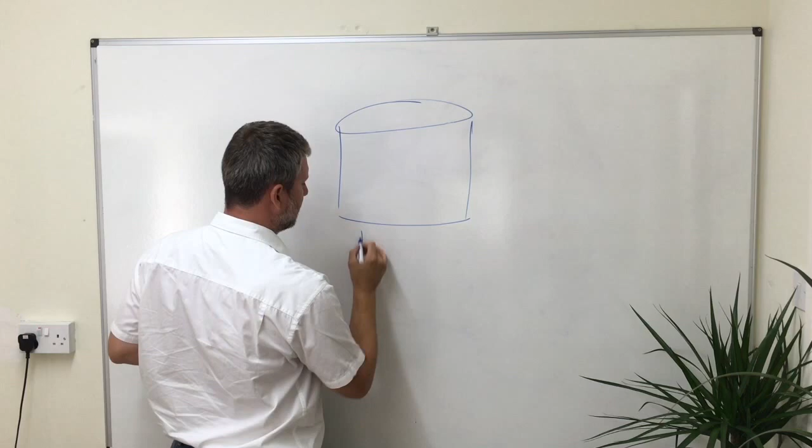so we'll start: if you were doing R&D, for example, and you just wanted to measure the inner air temperature of your mould, quickly dip in, measure the temperature, and get back to production. So let's put our mould here. Let's say our mould is here, and we've got a slip ring, with an arm coming out here. So where is the best place to measure the temperature of the inner air?

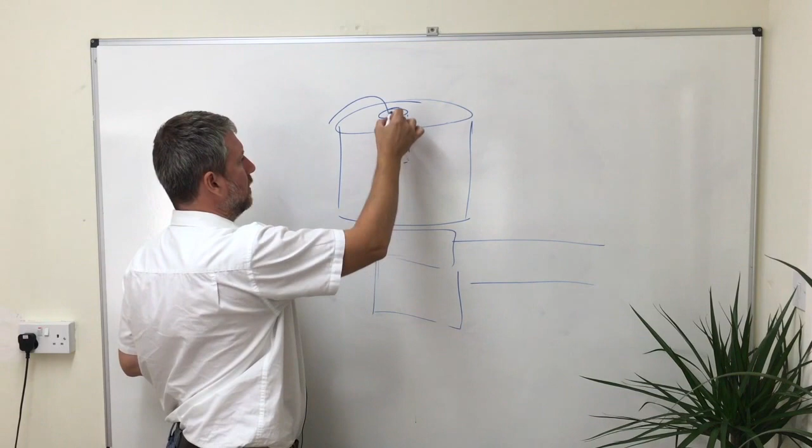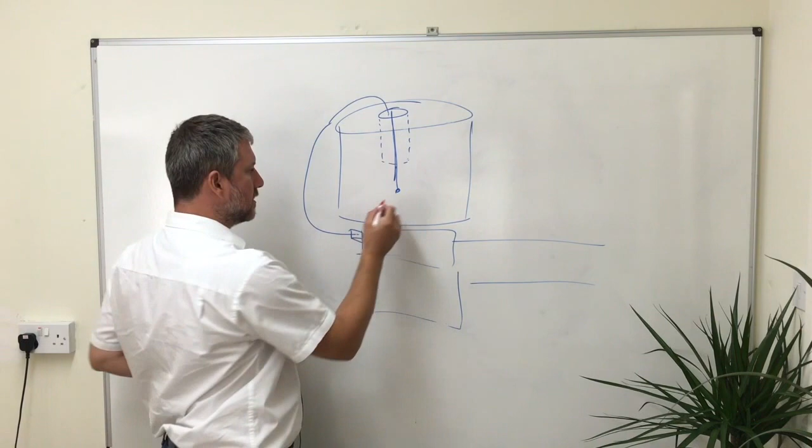Well, the easiest thing to do is just to put a simple thermocouple through the vent pipe, measure the temperature that way, bring this round and plug it in to the slip ring. That's easy to do. If you're doing R&D, then you can use some of the bare beaded thermocouples. A bare beaded thermocouple has got a very high response to changes in temperature, and so that will let you see all the intricacies of what's happening inside that mould.

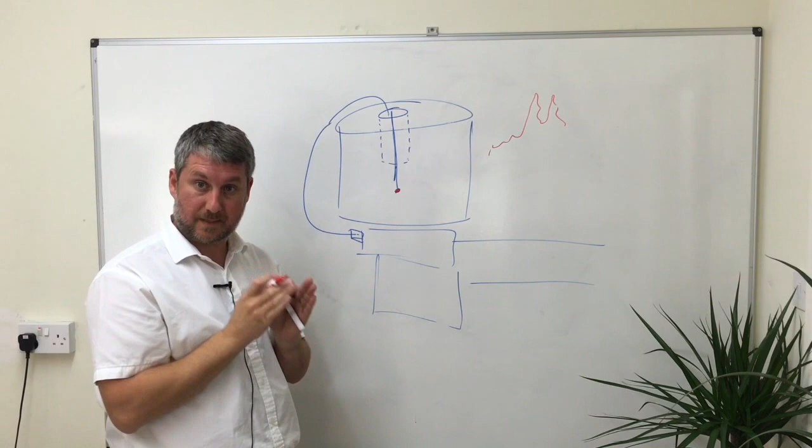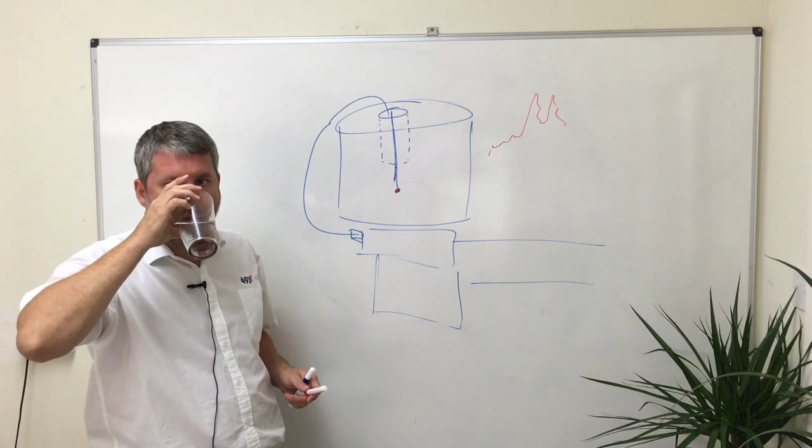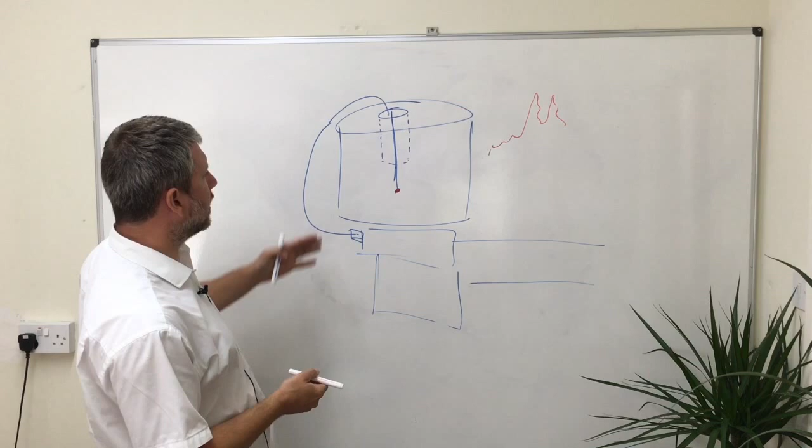Okay, fast response, because the part of the thermocouple that is doing the business is not in any way sheathed to reduce the speed at which the temperature can get to that thermocouple probe. And if you're operating in a production environment and you've got your guys demoulding this every time, now let's say the flange is here, well, they're going to have to remove that thermocouple every time.

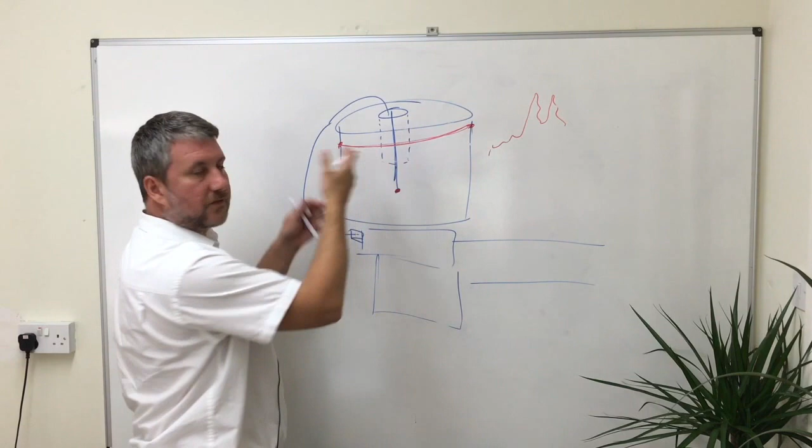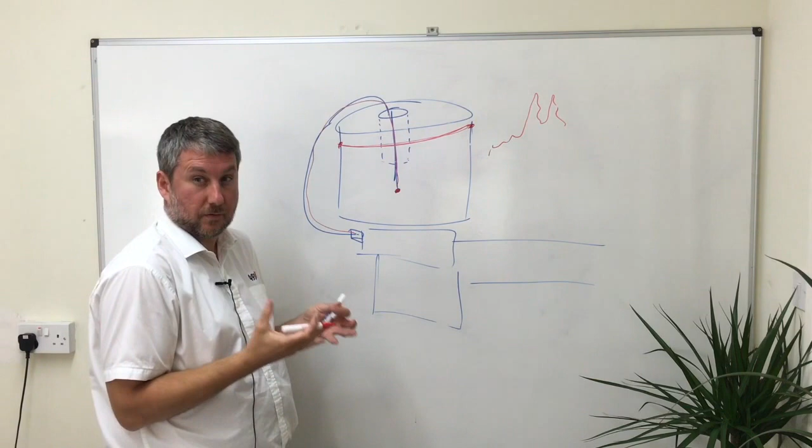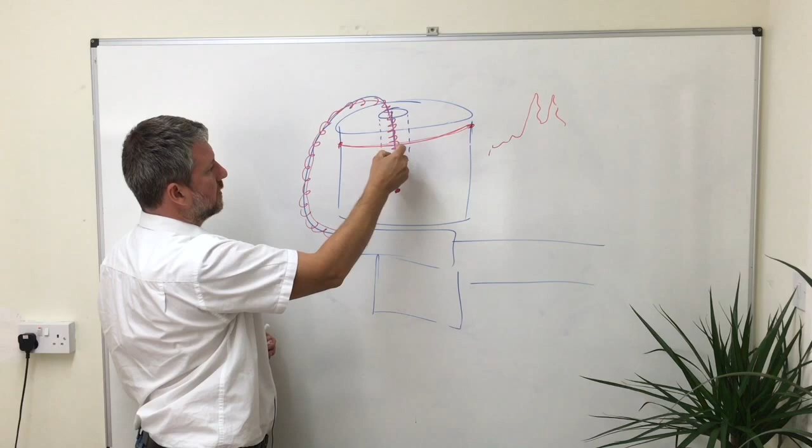So then we want to move away from just the simple cable with a bare bead thermocouple. We want to get into something a little bit more robust. So what we could do is use the production probes that we've got. And the production probe basically puts a conduit around the probe, and then at the end of the probe there is a sheathed tip, to protect that bead from powder and melted powder.

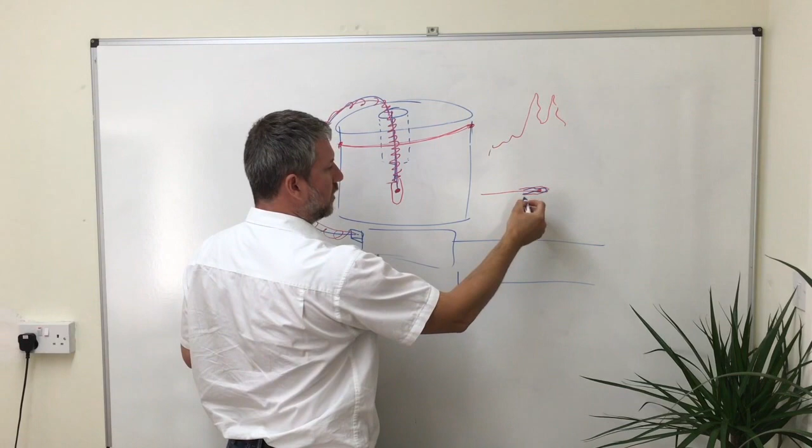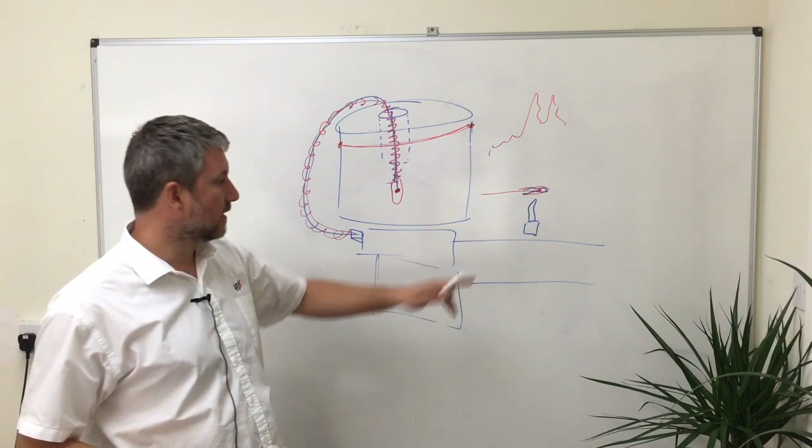So for example, if you use just the bare beaded thermocouple and you finish and you take that out of the vent pipe, you'll find that the bare bead is probably covered in a little bit of plastic now. And what you can do is you can either just cut that off, twist the ends together and make a new thermocouple, or you can put a torch, a flame below that, and burn the polyethylene off. It gets the polyethylene off, but it also destroys some of the sheathing near the tip.

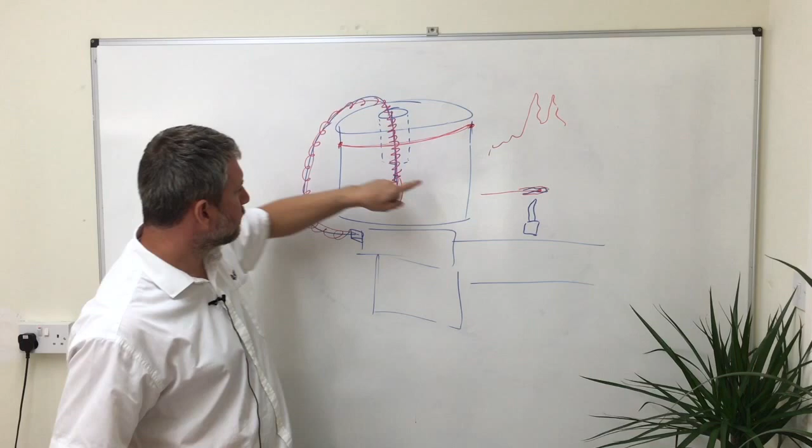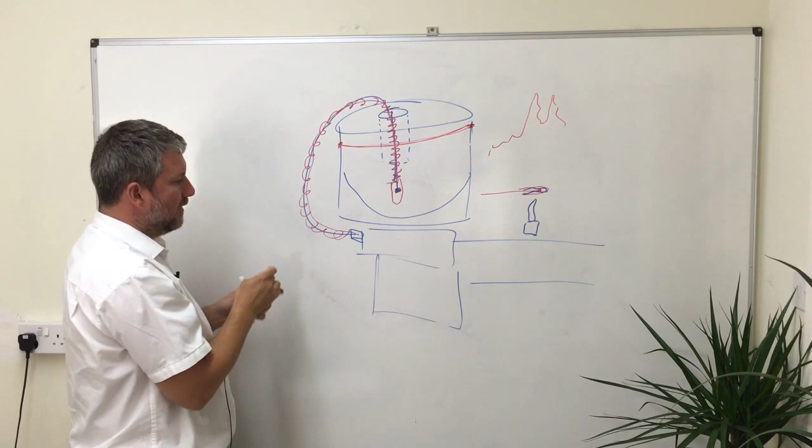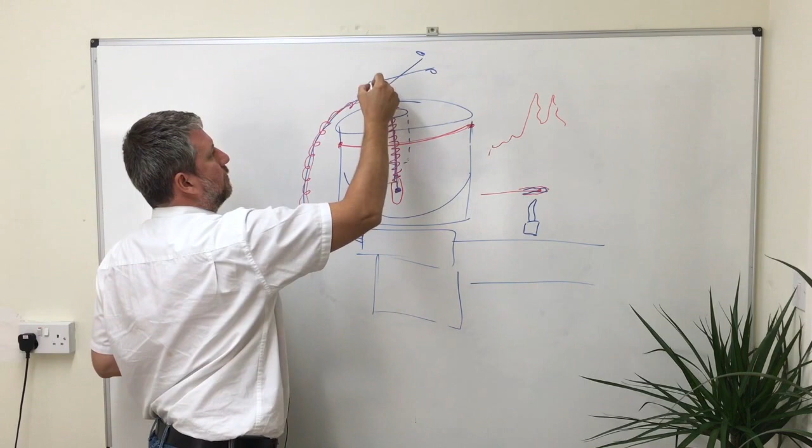Excuse me. The best way to do it is, of course, have this situated in a position where, as the powder is tumbling, the bead is not actually in that powder pool. So we've moved to the production side. We've got one production probe coming up. We could have a bracket here, or a clamp, like that's such a badly drawn clamp, but hopefully you understand what I mean.

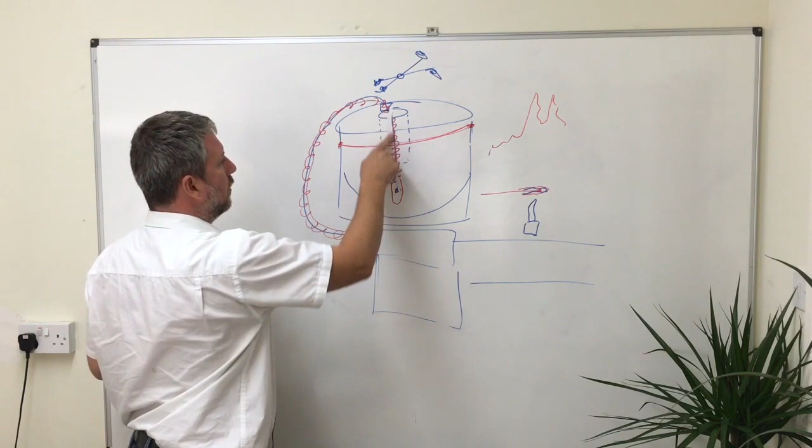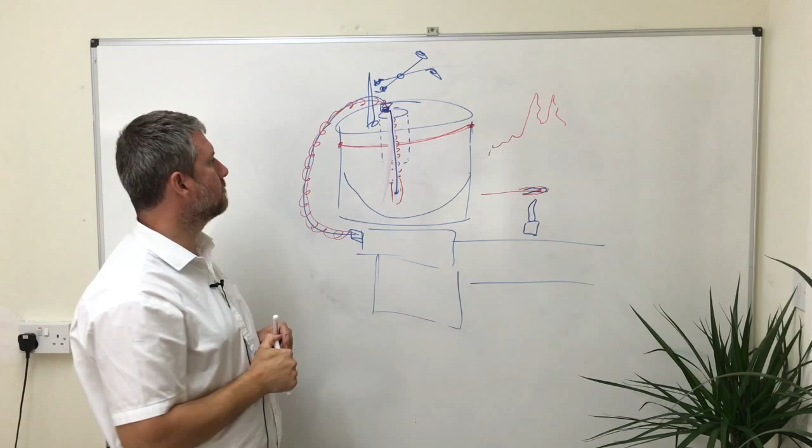Like an earth clamp that a welder would use, and clamp the probe, which would be stopping here, coming down into the air. Clamp that probe to maybe a post or something beside the vent pipe. You could consider perhaps just having an extension cable coming up here. So we could come out of here, come up to the side and have another socket on the top, and then you could plug the short thermocouple in there.

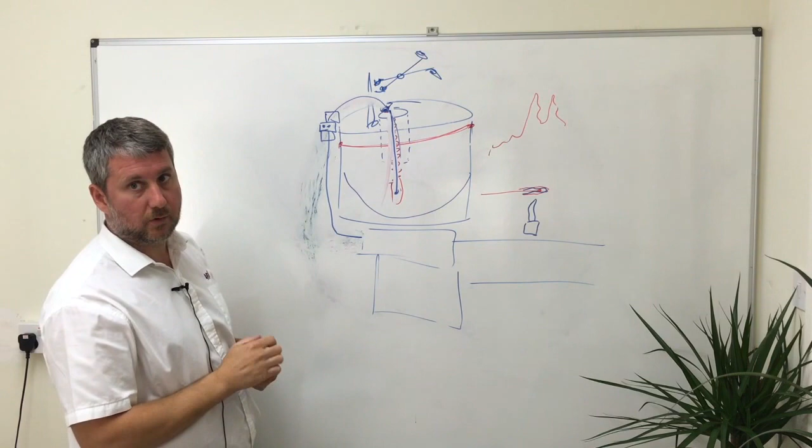So when it was time for demoulding, the operator would just unplug this. The probe would remain part of the vent pipe, and the probe and the vent pipe and even the lid would come away in one go, and you're left with this extension attached onto the side of the framework. Okay, what's the next stage that we can go to?

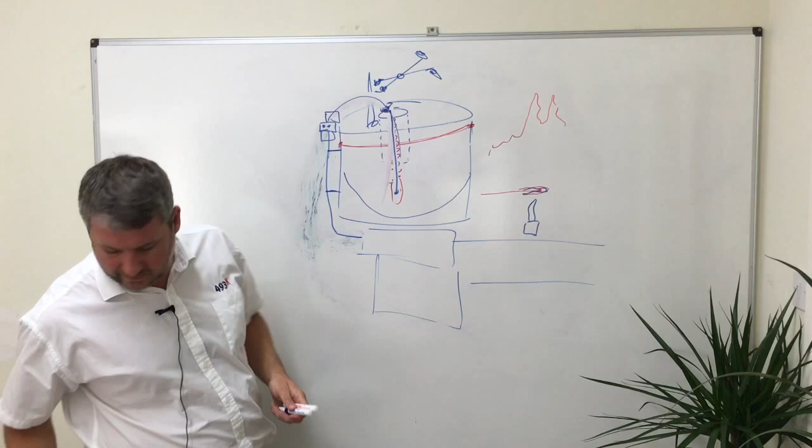Well, internal air is absolutely the best method of getting processing information back from rotational moulding. That's the one that all the research has been done about. That's the one that will tell you when to drop your second shot of material. That's the one that will tell you when the peak internal air temperature is right, when you've got your optimum internal air conditions. That's the one we want, if at all possible.

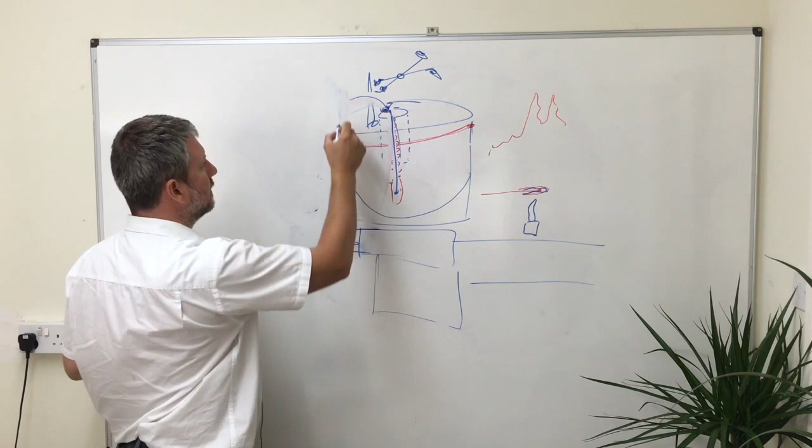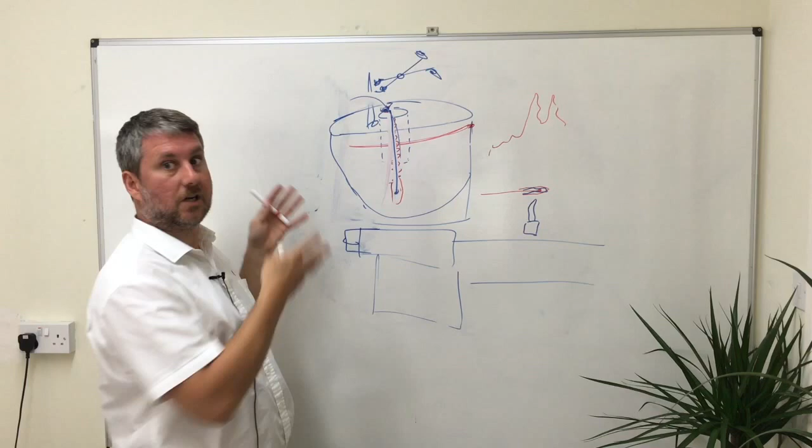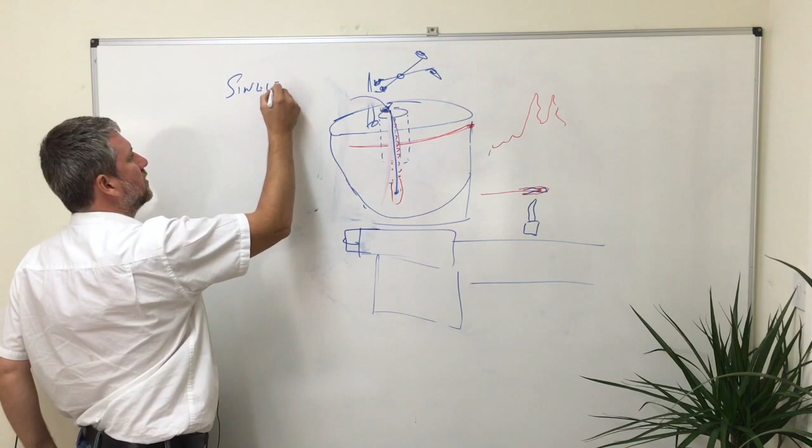But that's not always the easiest one to put in, because you're dealing with vent pipes, you're dealing with probes going into the vent pipes, you're dealing with operators touching that, okay? So what some of our customers do is they say, well, look, we are using a single wall part, okay? Just single wall, polyethylene, pretty straightforward.

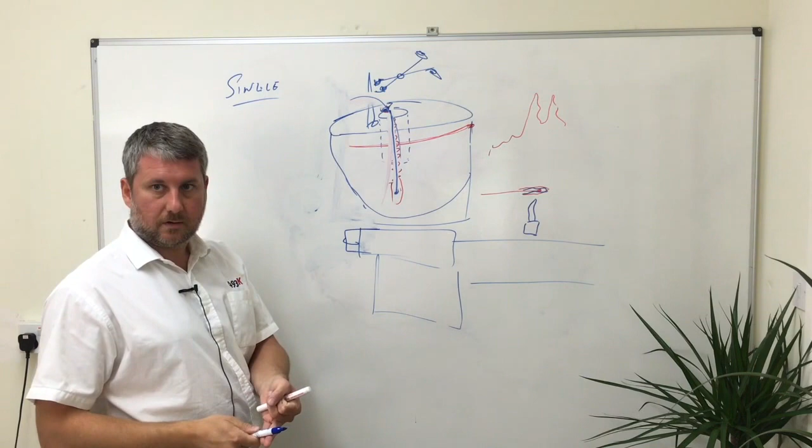We still want to measure the temperature because we're looking for consistent quality, we're looking for traceability. If our customer says, how was this one cooked, we can go into our server and find out. But we don't want our operators touching those probes. So what some of our customers do is they simply take the probe from the K control and they put it into the bottom of the mould. Okay. They don't put it into the air, they just put it into the bottom of the mould.

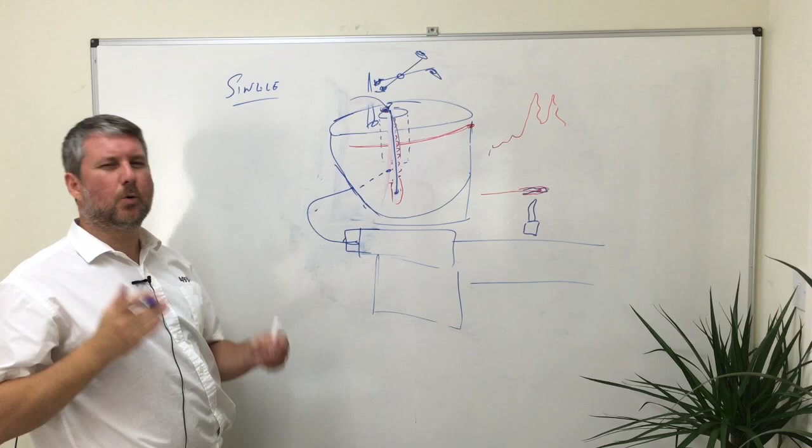They're measuring tool temperature. Well, not quite tool temperature, they're measuring an interface temperature. Let me show you where they put that probe. So if I draw this blue, the blue wall of the mould, the metal mould wall, and then we use red to signify what the plastic would be doing. So there's a plastic wall there.

Okay, and that probe would come in, and there would be a hole drilled in the mould wall, and if it's aluminium, you maybe thread that, and then the cable that comes from here would have a bolt on the end of it. Okay, bolt on the end of it. Cable goes out to the K control slip ring, and the actual tip of the thermocouple is just embedded here.

Okay, so you can see that it's just touching the interface between the mould wall and the plastic. Okay, it's not going to give you that beautiful internal air temperature curve that you get, showing you the peak optimum temperature to take it to. It's just going to show you a temperature. It's going to rise up.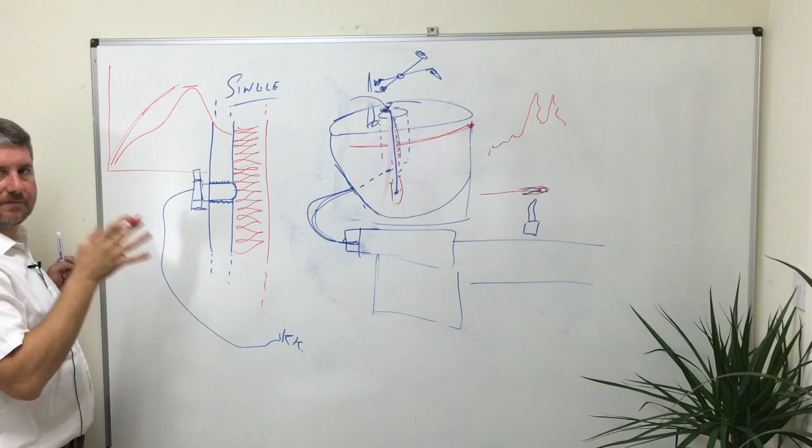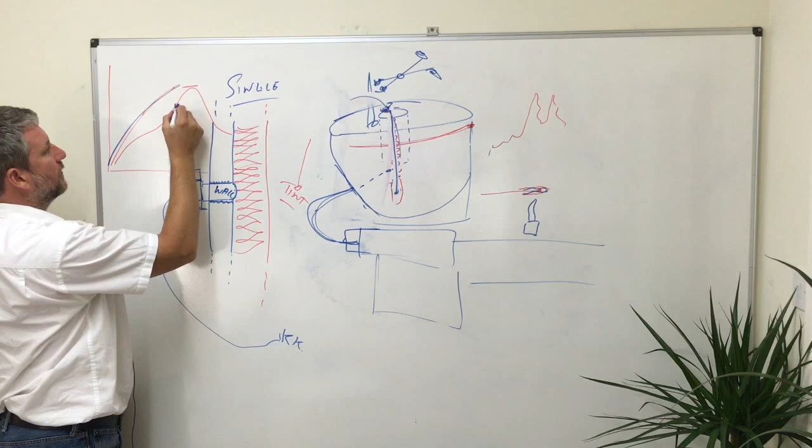But the first time you run this, you put two thermocouples, one to measure the internal air inside the part here, and you use one to measure the mould wall temperature here, and you correlate them, and you say, okay, for a perfect part, we need to take it out of the oven here, okay, and it will rise up.

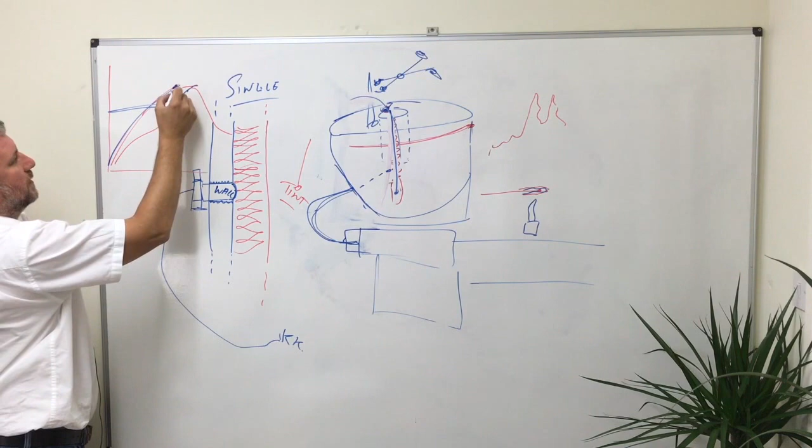So what temperature at that point in time is the mould wall temperature? Well, you just go up and you say, okay, so there's the temperature there, T wall and the T internal mould air. Okay, so there's a correlation, if you like, between the mould wall temperature and the inner air temperature. If you're doing single layer parts, that gets you a good way towards removing variability to do with ambient temperature changes.

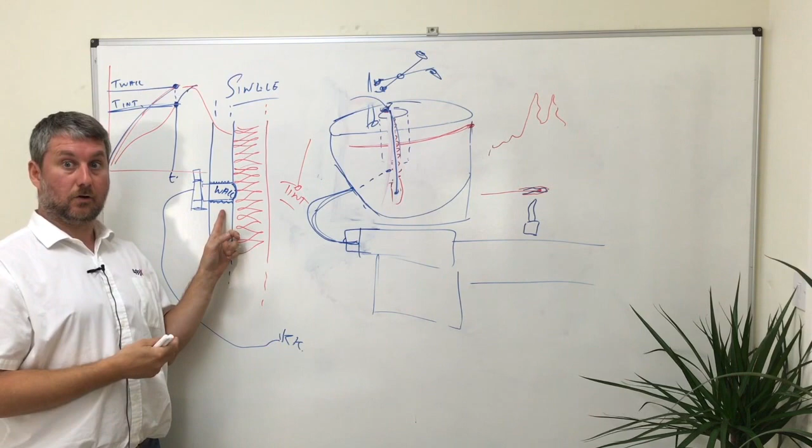If it's a very sensitive material, if you're into the nylons and the engineering materials, the exotic materials, you don't want to do that. You want to measure the inside air temperature. But for regular PE, this takes you a long way towards consistent control, compensating for variations in ambient temperature.

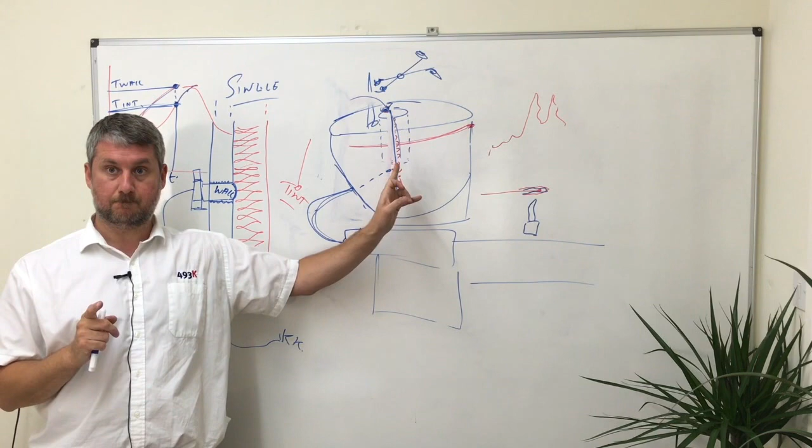If you are multi-layer, 2-layer, 3-layer, 4-layer, that's not going to work for you. You're going to need internal air temperature measurement. Okay, so you need therefore to get a probe inside there. So the two ways we can do that, let's just work over here.

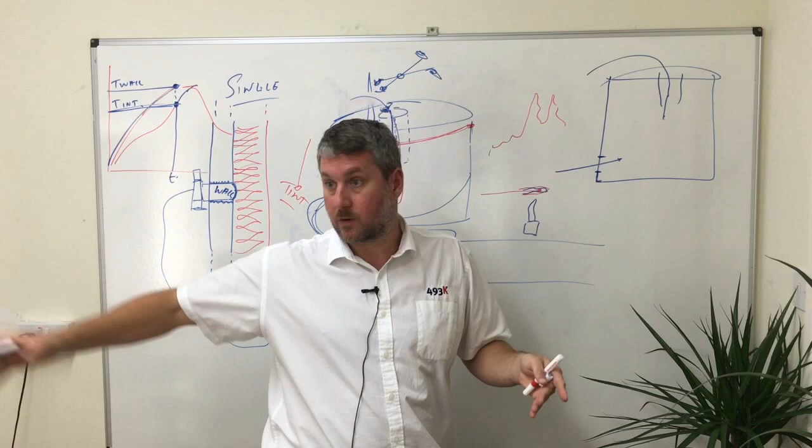The two ways we can do that, if we've got our mould here, we can either go in the top through the vent pipe, okay, or we can come in the side via some part of the tank that's going to be cut out. So if it's a tank, you're probably going to have an outlet here to screw or attach the pipe work for the system that the tank's going to be installed into. So that's going to be cut out.

So therefore we could put a probe in here. Okay. So we're measuring internal air here, or we're measuring it here. Now again, this temperature is close to the walls, close to the corner of the mould. It's not in the centre. And I would say just at this moment in time that this internal air temperature trace is good to compare cycles.

Okay, disadvantages with doing it this way for multi-layer stuff is, well, you probably need that vent pipe to get your second, your third shot in. Thermocouples are going to get in the way. And when it comes to demoulding, again, we're back to this scenario here. If you remember earlier, the operator has to take the thermocouple out, you've got this floppy lead, which is increasing the chances of it breaking.

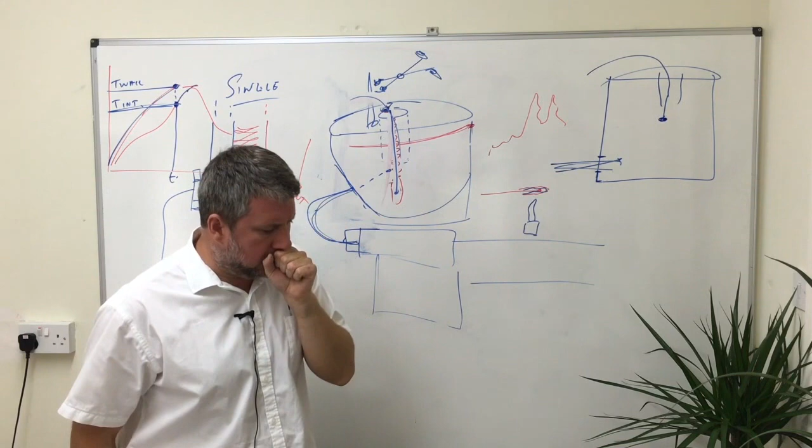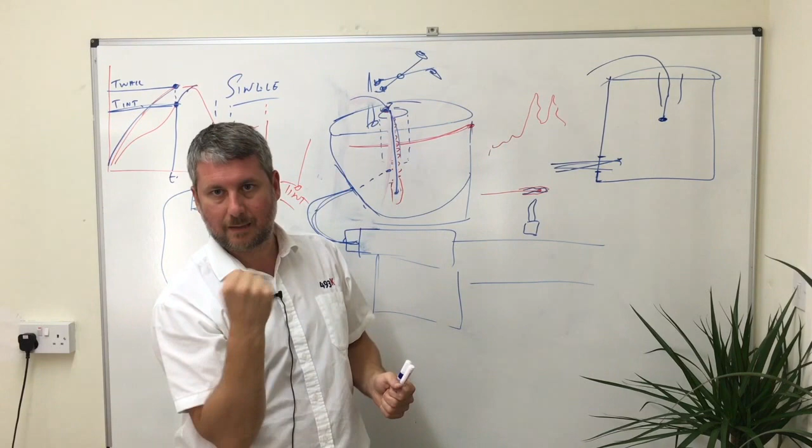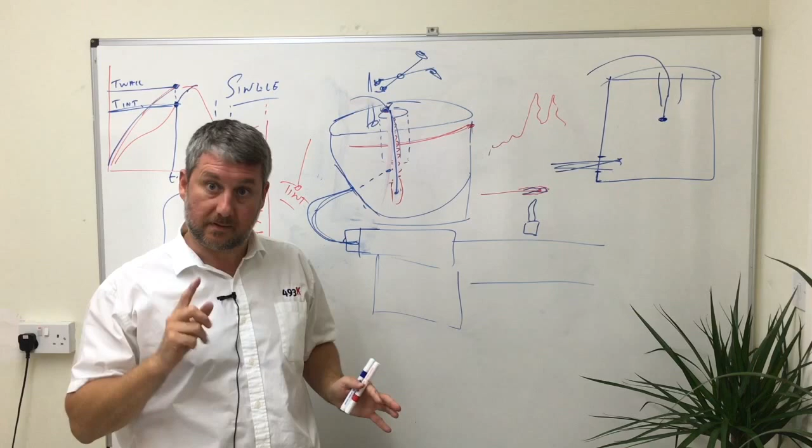So what I would say is, find a spot where you're going to drill a hole anyway, get a probe in there, and what you can do is build a jig, as I'm sure you will have already thought about. Build a jig to easily remove that probe. That jig could be based on an over-center clamp. As you pull the clamp back, the probe comes out with it. It could be based on a spring, so you just pull it out and lock it in position. Then the guys can demould. You've got to remember to put it back in. Okay.

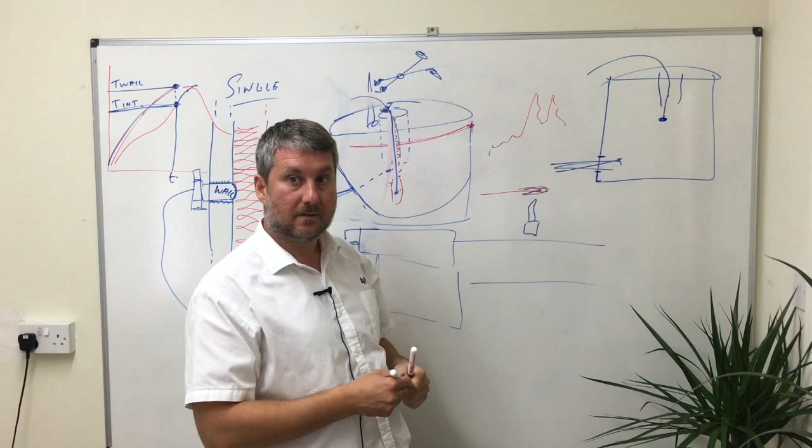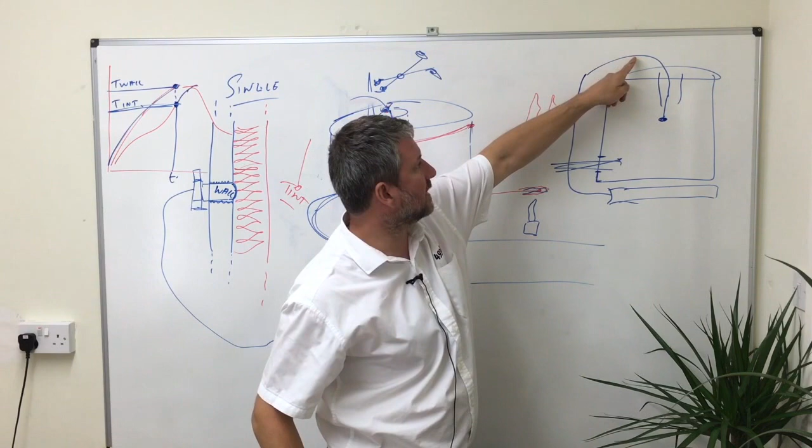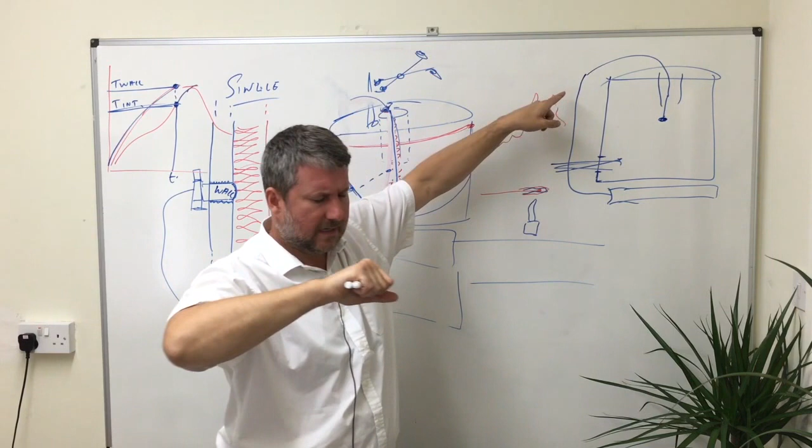It's always useful to prevent the guys from opening the lid, lifting it up, and forgetting to disengage the thermocouple and wrecking the connection to the K control. It can be a useful thing to put a small piece of chain between a fixed point on the thermocouple and the base of the mould. So if they are lifting it up with the crane, it'll catch in the chain and stop, so they can disengage the chain and then be reminded to remove the probe.

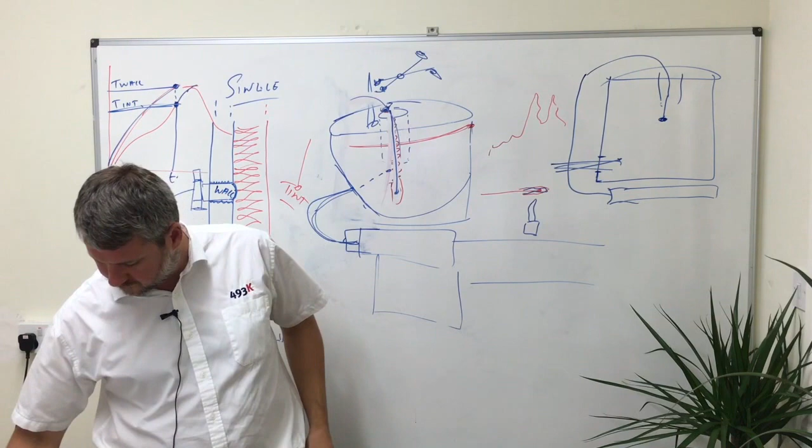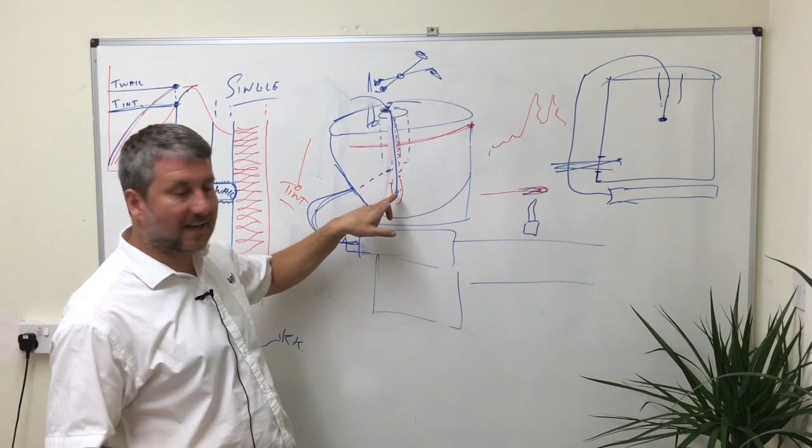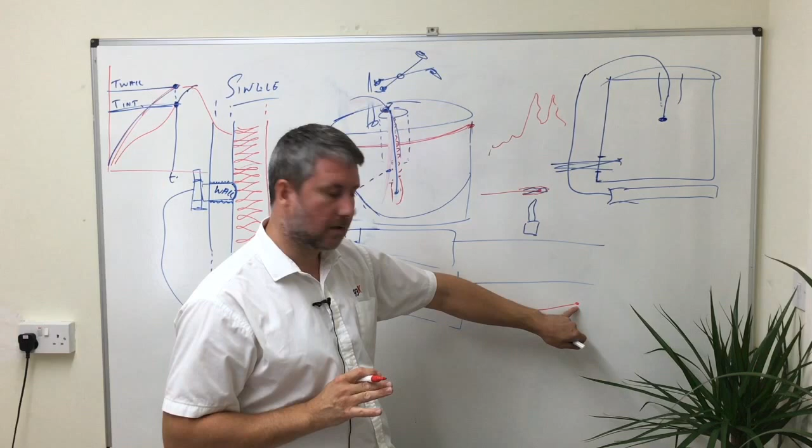So the actual probes themselves, we've got a couple of different types that we have used over the years. We're looking for a bit of a balance here. The fastest response, the best data that you can get back from a probe is when it's just a bare bead, okay? A bare single point bead. We'll call that BB, bare beads. Bare beads give very fast reaction times. So if you're doing some kind of R&D work or process setup or product setup work, you probably want to start with a bare bead, because that will let you know what's happening inside that mould. That's going to help you understand what the powder's doing.

Okay, but that's going to be useless for production. Your operators are going to have that wrecked in no time at all. So I see these bare bead probes as almost disposable. You use them once or twice and you get rid of them. We can supply a roll of that cable, and then you can make them up very simply. A roll of cable and a dozen plugs to go into the K control and you're good for that kind of R&D work. So we're looking for something a bit more robust.

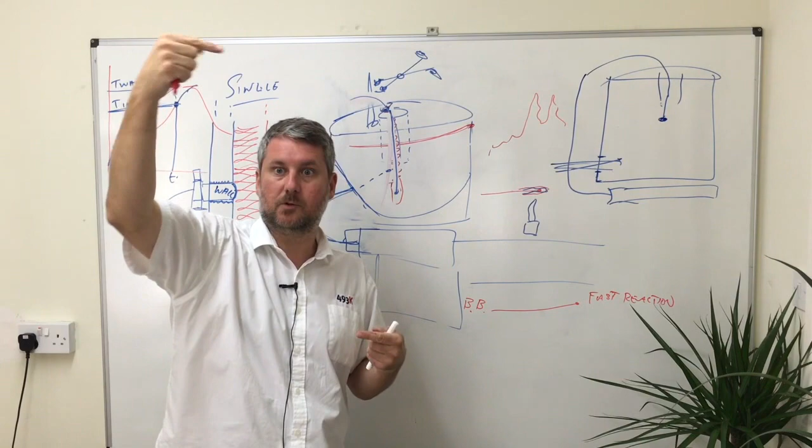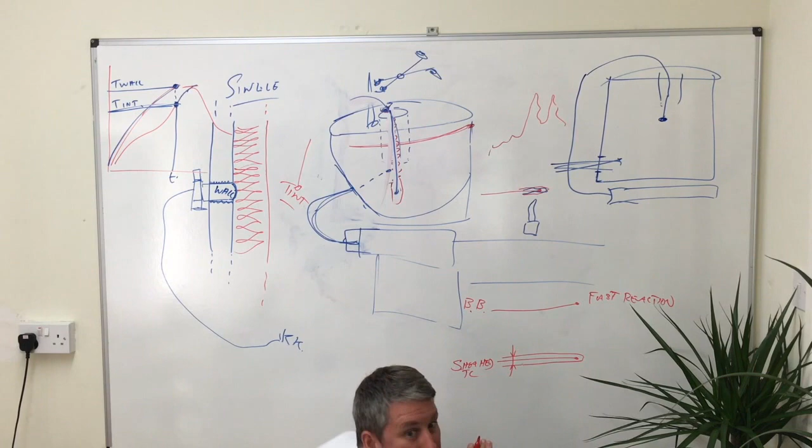So let's go to the opposite end of this. What we're talking about here is a sheathed production probe, much like you would see if you've got an extruder. You know, those process probes, or an oven, you see a big process probe coming in the top. So what we've got here, we'll call this a sheathed TC, and basically that is a bare bead with a sheath around it, and that sheath, as an absolute maximum, we're talking 6 mil.

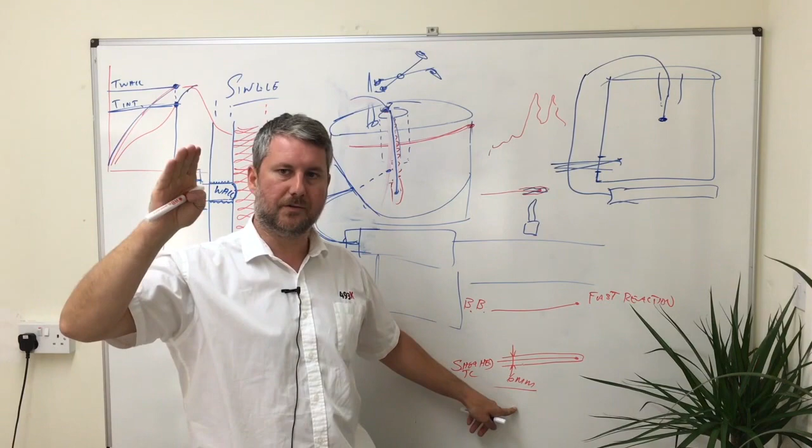Okay, we're talking 6 mil maximum. Even 6 mil is absolutely on the limit in terms of the speed of the reaction. So for a 6 mil probe, we're going to put down slow reaction.

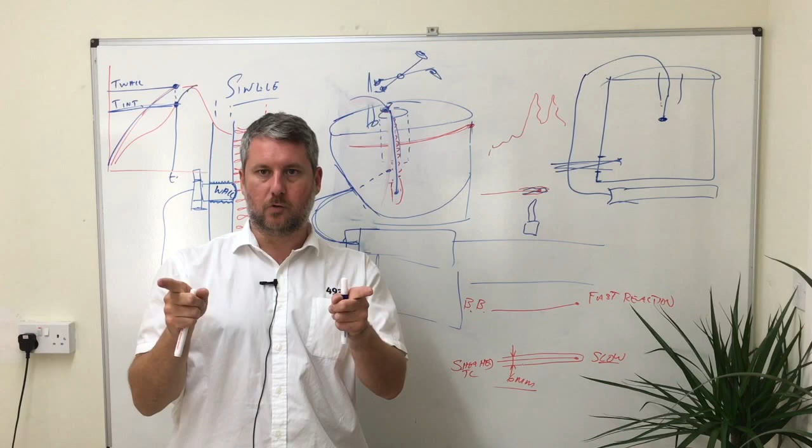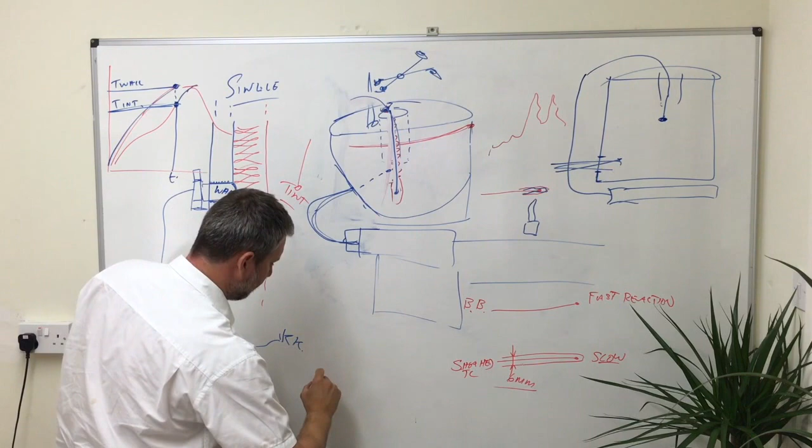Okay, so if you were to put 2 probes into the K control, a bare bead and a 6 mil production probe, and you were to measure them at the same time, the bare bead is going to come up nice and fast and down. The 6 mil one is going to be slow to react, so it might do something like this. Okay, so it will be slower to react, slower to respond, really robust, really strong, harder to break, but doesn't really give you the information in a timely fashion.

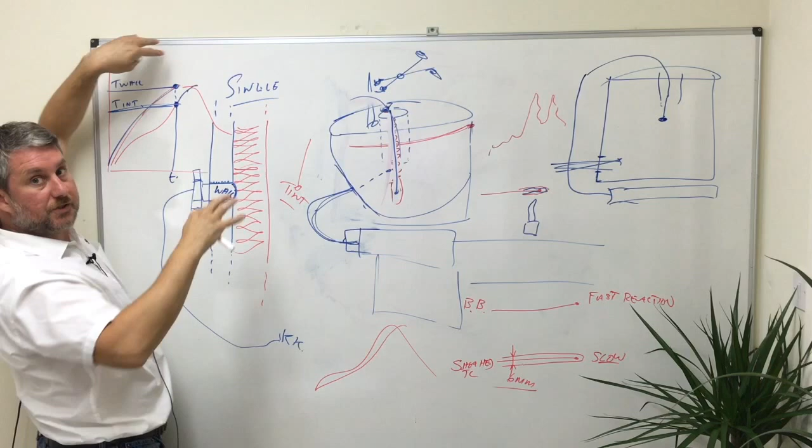You can correlate it, as we talked about up here, and say, yeah, that's okay, we'll work with 6 mil, we'll get up here, and when it's finally responded, we know that the true temperature is back here somewhere, and adjust for that. But what that is, it's just slowing things down. It's not giving you the true reading. It's giving you consistency, but perhaps not precise real temperatures.

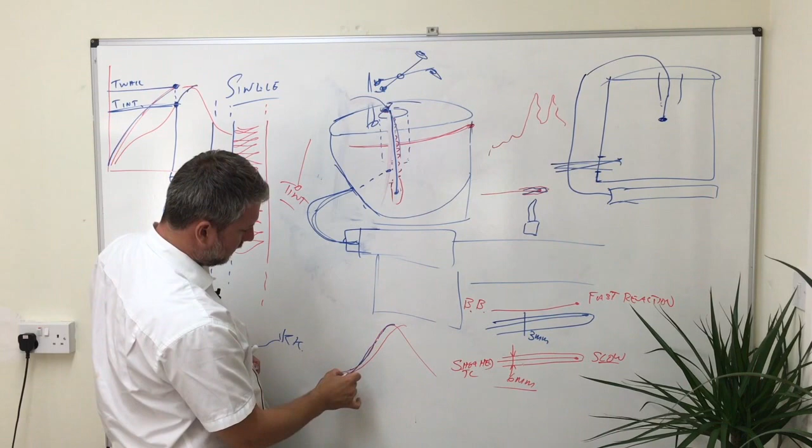There's 2 in between here we're going to now talk about. The 2 in between is to use a sheathed thermocouple, which is 3 mil in diameter. The 3 mil in diameter probes are much more fast reacting. Okay, so if you were to do a 3 mil probe against that red one, we're probably 5 degrees out here and there in terms of the response. So it's not a big deal.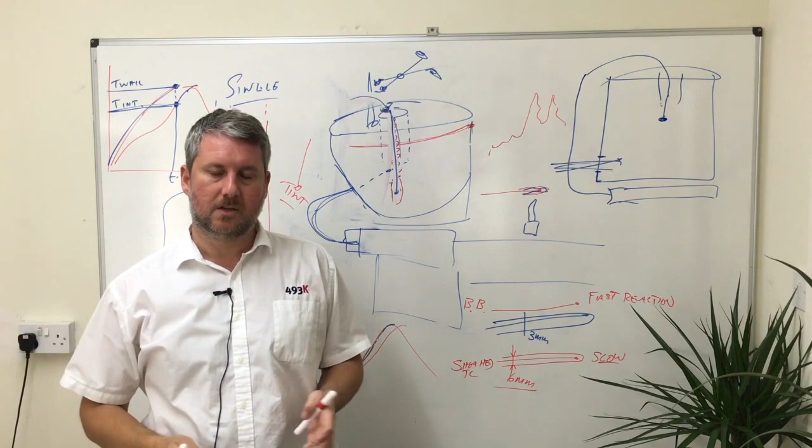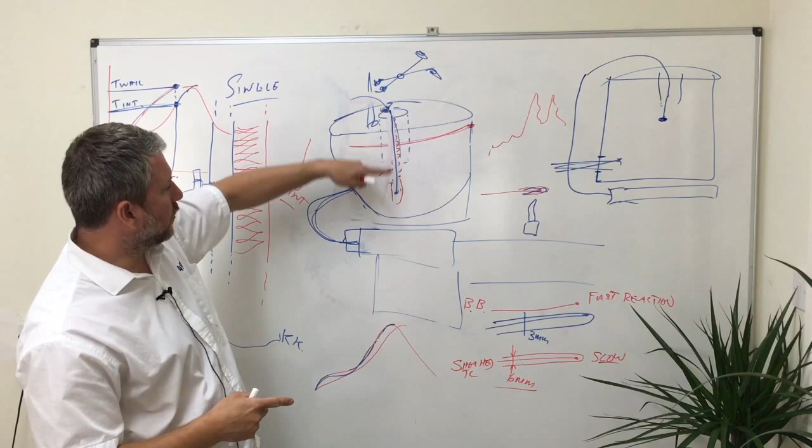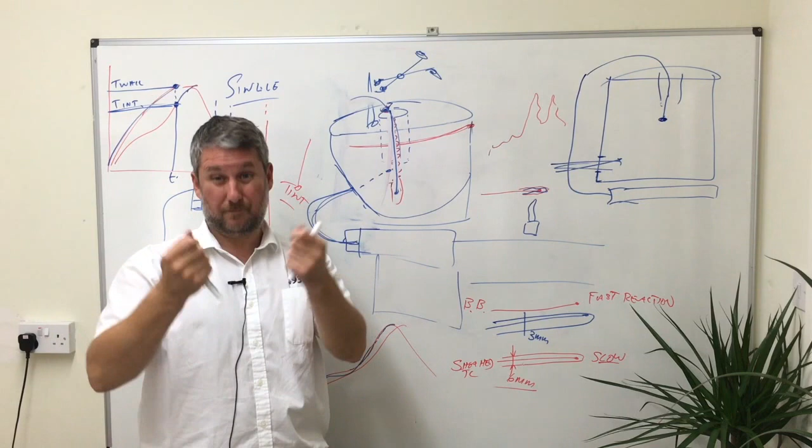Our cycles are long, 20-minute cycles, 30-minute, 40-minute cycles. So we're not looking for fast lightning response here. 3 mil is spot on. Problem with 3 mil is if you want a long 3 mil probe, say going into the vent pipe, it's maybe going to be 300-400 mil long, and before very long there's a good chance that the operators will have bent those probes and damaged those probes.

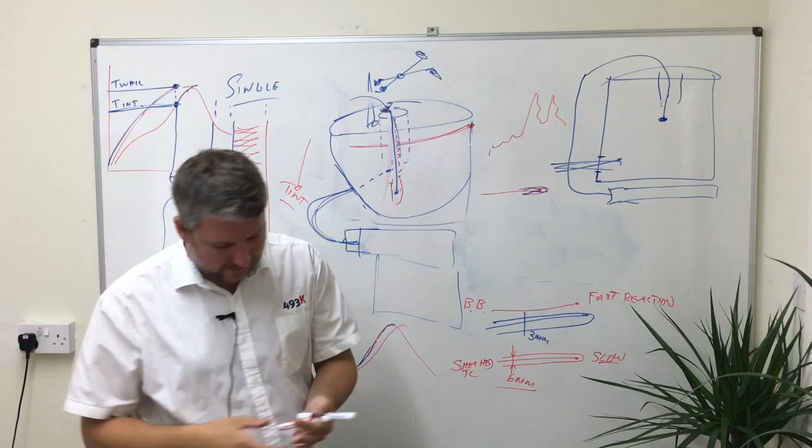The optimum one that we're using now is the 6 mil probe on the body, okay, with a reduction to 3 mil at the point where it matters. Okay, so let me just get a bit of space here, up here. Oh, it's a mess. And with the 6 down to the 3 mil probe, that there is the safest in terms of accuracy and in terms of robustness as well.

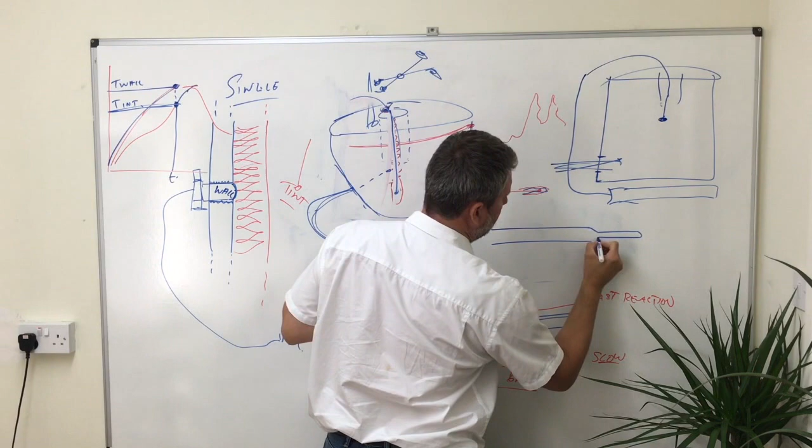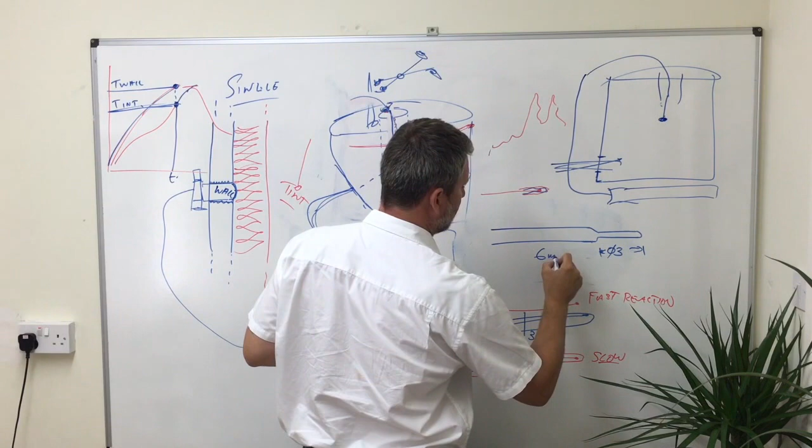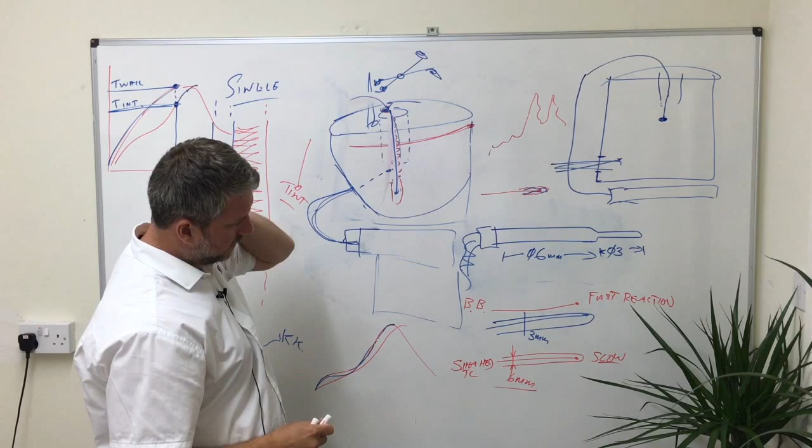So it looks something like this. You've got a 6 mil probe, and then for the last 50 mil or so, you've got 3 mil diameter. So you have a 3 mil diameter at this point here, and then you have the 6 mil diameter for this length here. Back here we've got our convoluted tubing to show that working. Okay, 6 mil is good because we can secure fittings to that as well, which is very useful.

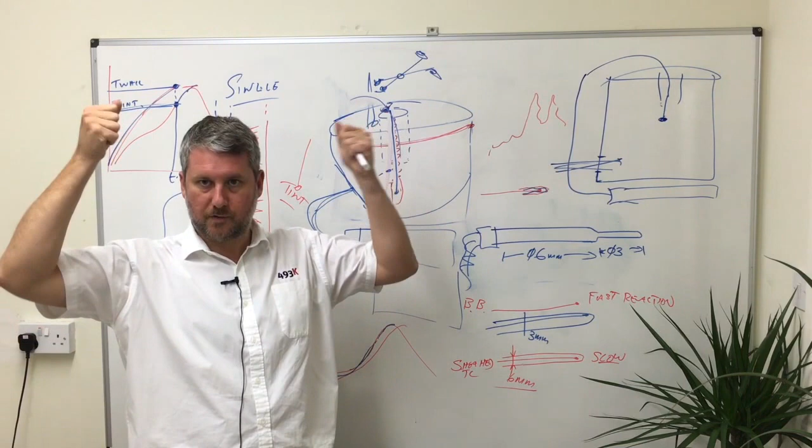Now we're going to take a slight detour. I want to talk about static in rotational moulding and how that affects our system. Okay, so whenever you take a part out of the mould, I'm sure you will have heard whereby as the mould comes out, the static charge is built up, and if you touch that, you get a bit of a dig. There's about 20,000 volts generated there on removing that. And that's all building up just when you take it out.

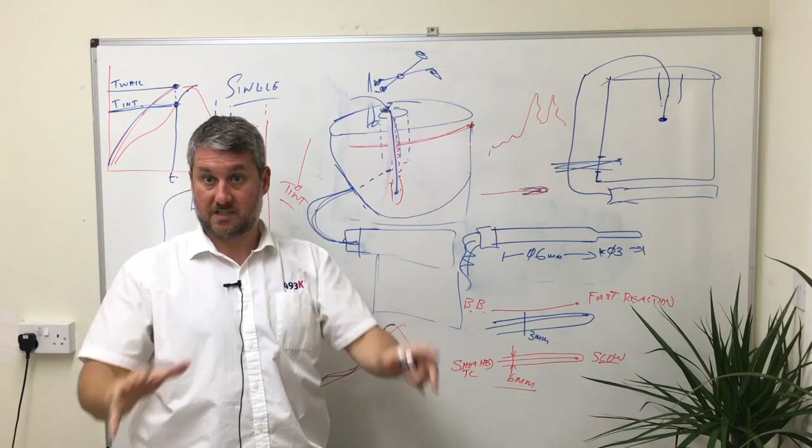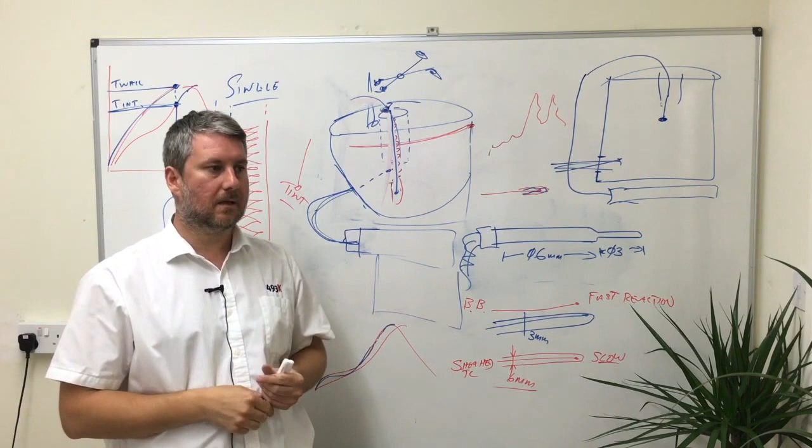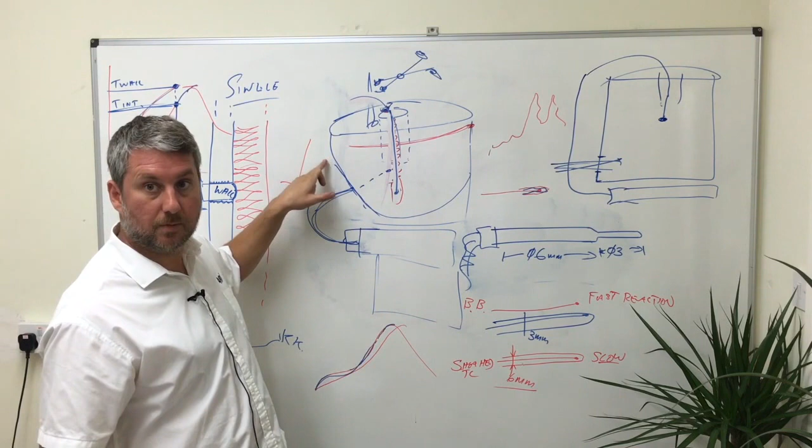Okay. If the mould itself is well earthed, then that should just dissipate out of the mould. But often with the grease and whatnot around the bearings, that charge is not dissipated to earth via the mould. So what happens? It's dissipated to earth whenever a guy touches it, bang, or through the thermocouples. And that has been a problem in the past with bare bead thermocouples on the electronics. So you should always disconnect your probe if you're using a bare bead thermocouple. Disconnect it before demoulding. Okay, otherwise you'll be sending 20,000 volts down a thermocouple cable to your radio at the back of the arm. We have got some very robust protection on there, but why do it if you can avoid it?

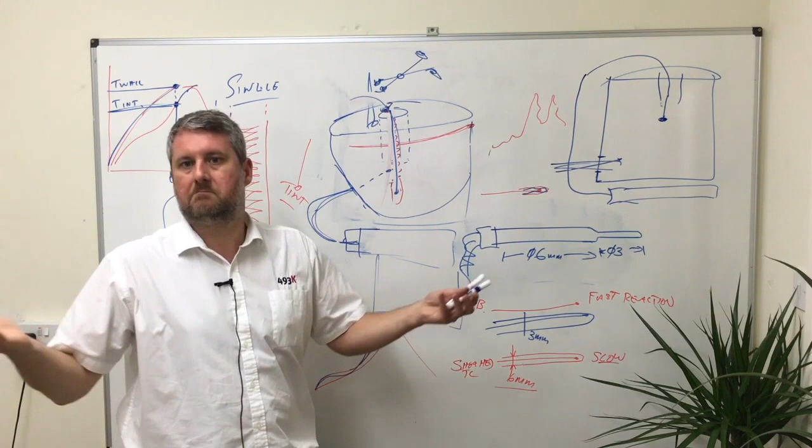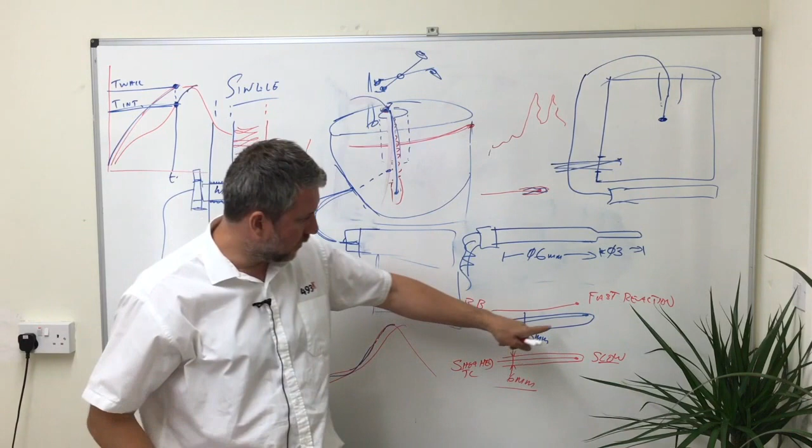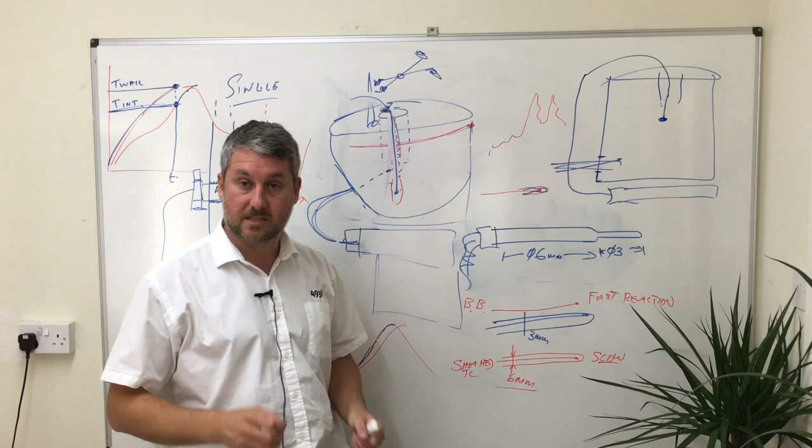Okay, so with that in mind, we therefore say that when we move to sheathed thermocouples, they should not be earthed thermocouples. Okay, so that means if you look here, this one here, you see that the thermocouple bare bead is inside a sheath. Well, our thermocouples that we supply, the sheath is packed with an insulating and non-conductive.

One second, John, could you bring me up a production probe, please, just for a 493K production probe, just to show on the video here that I'm recording.